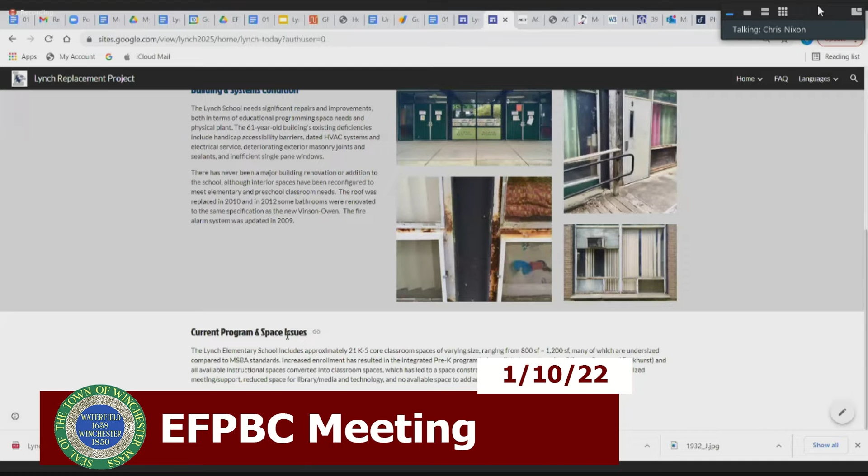We next have a page that describes what Lynch is today. It was designed as a junior high school from the very beginning in 1960. So there's a description of how the current school was intended, its size, and its overall condition with respect to the building and building systems. We also briefly describe some of the program shortcomings we have at Lynch, most importantly because it was never designed as an elementary school to begin with.

This is an interesting page that many people will be interested in - the site. It is a large but complicated site. We're adjacent to Horn Pond Brook Parkway, and we have setbacks required because of the floodway and floodplain conservation issues and restrictions here.

And then really the elephant in the room is this huge chunk of the site that's really not ours. This is not school department property. What you see labeled water department land was actually a well field built in the late 1930s in Winchester, used until the late 1950s, until we submitted an agreement with the MWRA.

So it's not our land, but our TAP A design team has determined pretty quickly that if this were our land, it might present some unique planning opportunities. For the public who didn't already know, at the last EFPBC meeting on December 20th, the committee formally requested the school committee explore a land transfer agreement with the select board, under whose authority this land sits today, even though it's an abandoned well field.

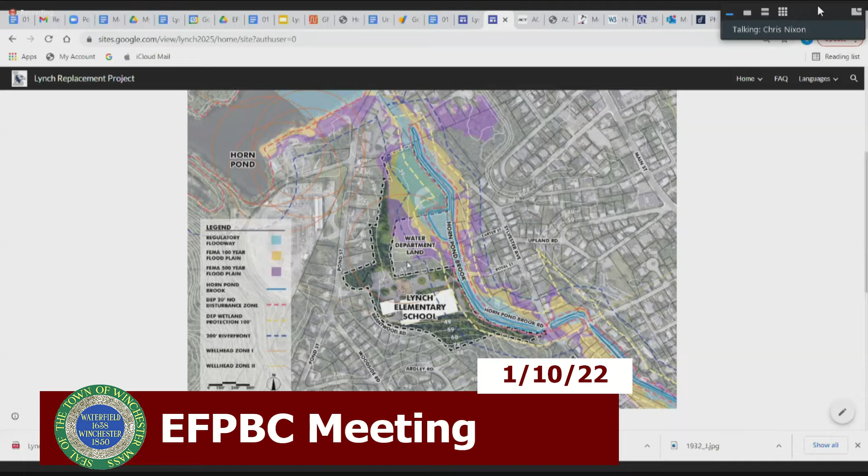There are 25 or 26 abandoned drinking water wells on this property. The school committee heard that request, we've discussed it, and we look forward in the next couple of weeks to having that conversation with town management and the select board. That'll be important for us moving forward.

If there is ultimately a preferred scheme - and Charlie will certainly dwell on this a little bit more in the presentation tonight - if there is a preferred scheme for the new Lynch that in any way relies on that land, it needs to be our land by the time the board votes on the approved preferred schematic in September.

And the final step in making that land transfer involves town meeting. So this is going to be, very quickly, a critical path item that may come before spring town meeting. For those who live in the Lynch neighborhood and care to go looking for it, the foundation of the old pump house is still there today in the woods. I think we will just continue to update this blue field with time when we have more information on how the conversation is going with respect to land transfer.

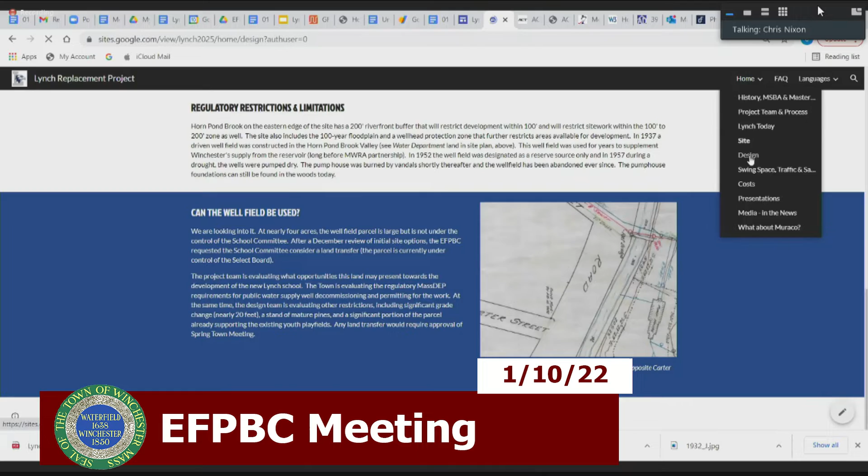Then we're going to go to a design page. Obviously a lot of information is yet to be posted because we're only just coming out of the starting blocks with TAP A. But here you see again a reframing of some of the conceptual design ideals the MSBA is looking for, some of the key metrics we'll be evaluating as we consider these different options. We also described some of the key project goals that were published in the project RFP, including our recognition of Winchester's climate action plan, adopted back in 2020. The school committee certainly is expecting a LEED certified building, so that's important to us as well. But look for much more information here on the design page.

There's been much conversation about swing space for the Lynch project. Swing space is just temporary space that accommodates students during construction. Here you see a description of the short and long-term benefits of swing space. We have a little history page about how swing space has been used on all three of the last major school reconstruction projects. With swing space, we actually moved the students from the Lincoln, Ambrose, and Vinson-Owen schools completely off-site for construction.

And then inevitably we often get questions from the community: what and where is Parkhurst, which comes up in conversation as a potential swing space destination. So some history here about that building, as well as some language about our future traffic and safety concerns when the project moves forward.

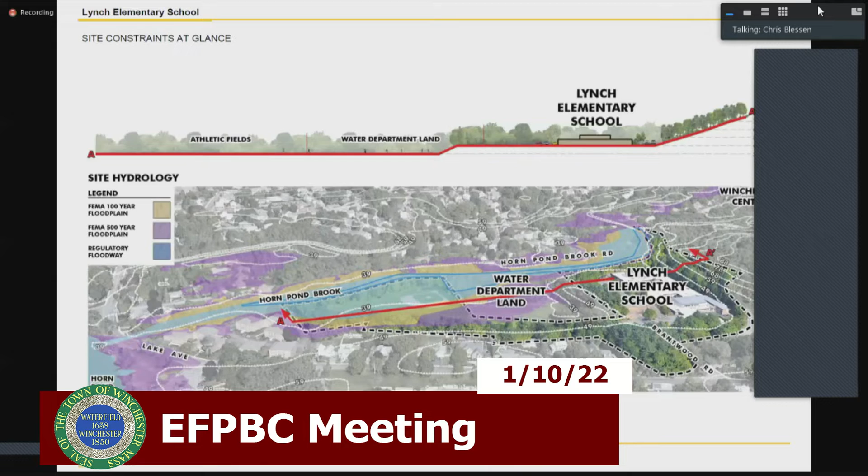So the first option was the renovation option here. What you see that we've added to these is primarily in the middle column, between the image and the description on the right. On the ones we carried forward from the last meeting, we started to add in a first floor concept idea where you can see what the first floor is doing.

Right now is not the critical moment to be talking really heavily through architecture or arrangement, as we've just started to touch the iceberg on those ideas, and we'll have more to talk about at the next meeting in terms of education and how these buildings, these different schemes, lay out.

But for now we're just talking about the first floor concept and the way that builds, because it has implications for the grades, the grade configuration, which is the second note down below the floor concept. And in reality, the renovation scheme, as one might expect, produces no change to how the building is configured currently.

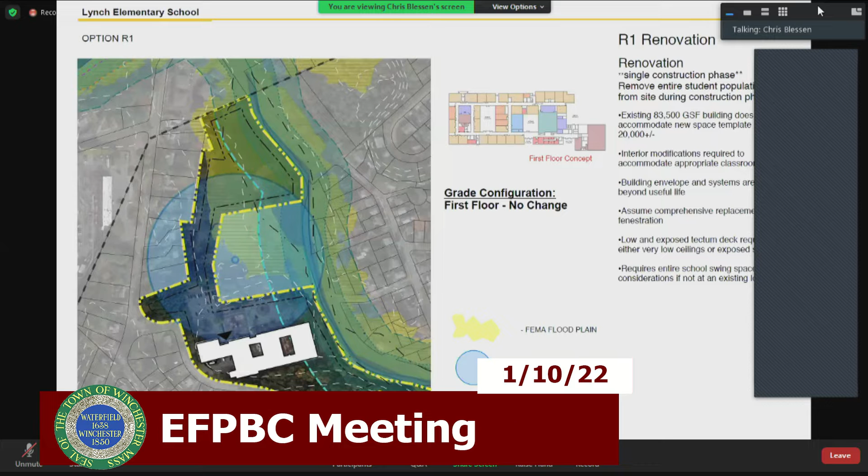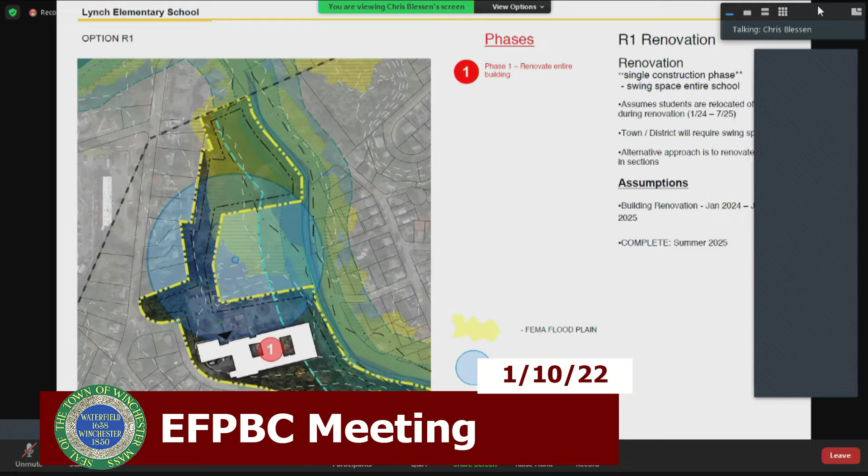And so this is that option, and I'll keep going here and show you the site plan is going to be the same. Just remember that this project requires that it be done all in one go, in one phase, which means this entire school would be in swing space for the entire duration of construction. And then there's that 3D perspective.

So this was AR1, the addition renovation, and this is the one that we had previously determined would drop off the list. I think it was mostly because of the vast disruption to the building and to the use of the building, and to the simultaneous construction and use.

It disrupts the site a little bit more than AR2 during construction, and so we have taken this off the plan. The committee removed it from consideration on the last one to favor another option.

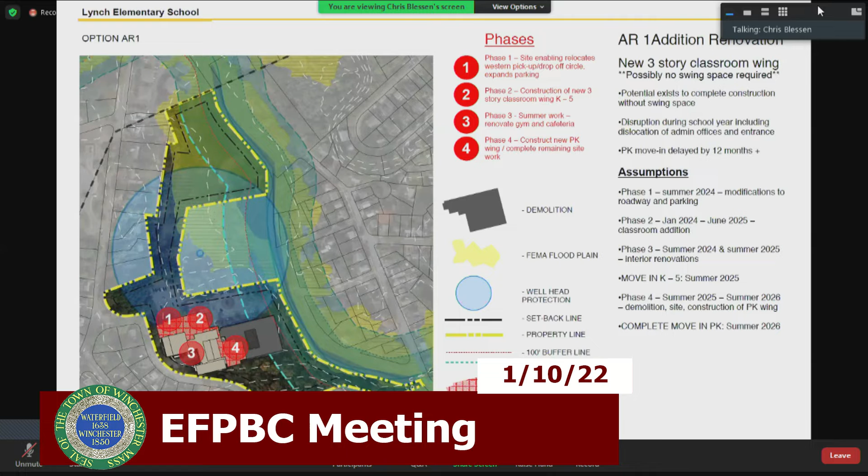Can I stop you just for a second? There's a gray box on the right-hand side of the screen. I don't know whether you can remove it, but it's blocking some of the text. Is that helpful? It's still there for me. Oh, there it's gone, and there's one at the bottom too. Let me see if I can get rid of that. These are the controls for Zoom. I don't know, I could move it. I'm afraid to click buttons there, so I'll probably leave the meeting. That is substantially out of the way though, what you just did was really helpful.

I think there were two others like that. Those are not 2025 completions. Those were some options that would take an entire other year, right? So I think that was something the EFPBC wasn't really interested in, going out to 2026. 2025 is a goal that we all want to pull for. Right, correct. So you'll notice that the duration extends if we don't do swing space or get aggressive on how we plan these things out.

Okay, so I'm sorry, let me go back here. So AR2 is where we are now, and this is another one where we were contemplating that swing space is required, but remember that the MSBA requires that we carry forward an addition renovation option. Out of the two addition renovation options we moved forward, this is the one that seemed more advantageous than the other one.

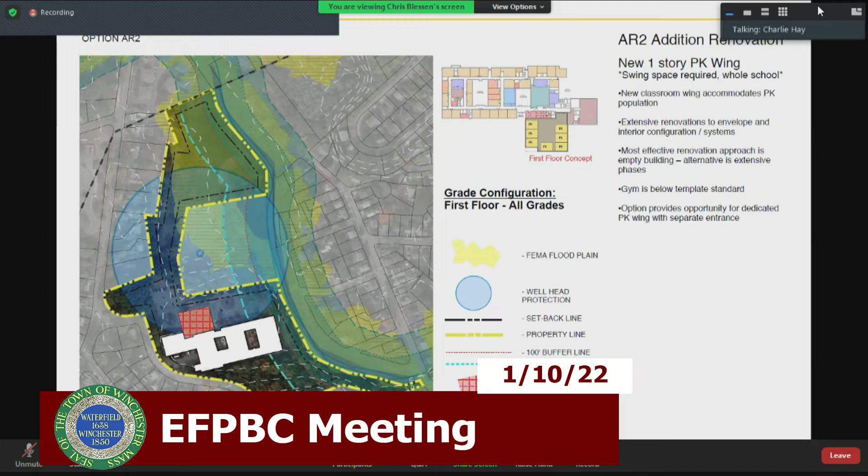Let me interrupt briefly in case anyone's scratching their heads at home. We'd probably have one grade on the lower level ultimately, so we'd have to add an elevator and have about four classrooms down there. So most grades are on one floor, but we're still assuming we're using all of the existing space in this building.

Then the phases are as follows. As Chris Blessen noted, you'd be able to move some kids in 2025, but most of it comes back in 2026 when the new building is complete. So there's some overlapping work, some nuance to phasing kids in and out of classrooms and swing space, but this would be a fairly significant disruption to school if the site is still occupied.

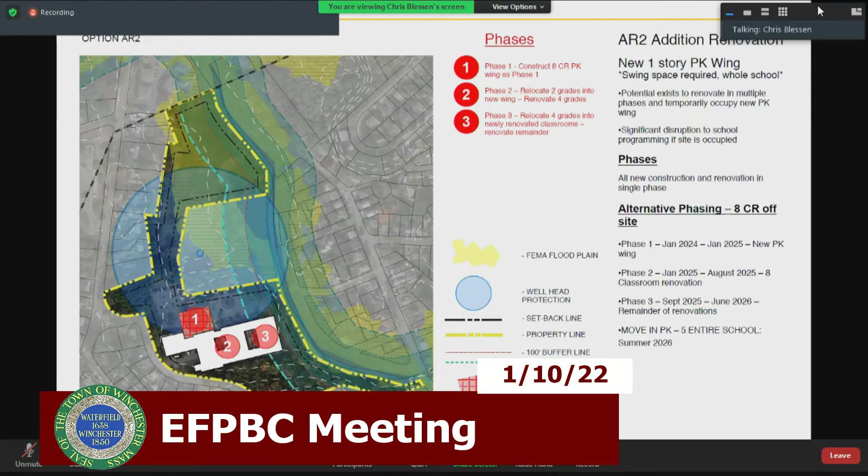This is a site plan showing what that renovation and addition might look like for this option. Again, similar circulation to what you have now. We'd have to move the pre-K play area and another play area to the northwest side of the building, but for all intents and purposes, site circulation remains much the same as what you experience today. The rest of the site would be updated to take advantage of the nature trails and natural context around the building.

One concern with this option is that the landscape architect felt buses would be better served coming in from the Horn Pond Brook Road side, which could be an issue since that's not how it is now—right now they come in from Brantwood Road. So that's something we'd need to discuss further. That was simply because you get a longer queue from the east, but that may not be a desirable outcome in terms of traffic. We're aware that this changes the current plan, and we did discuss it, but wanted to flag that these kinds of topics may come up depending on which option is being discussed.

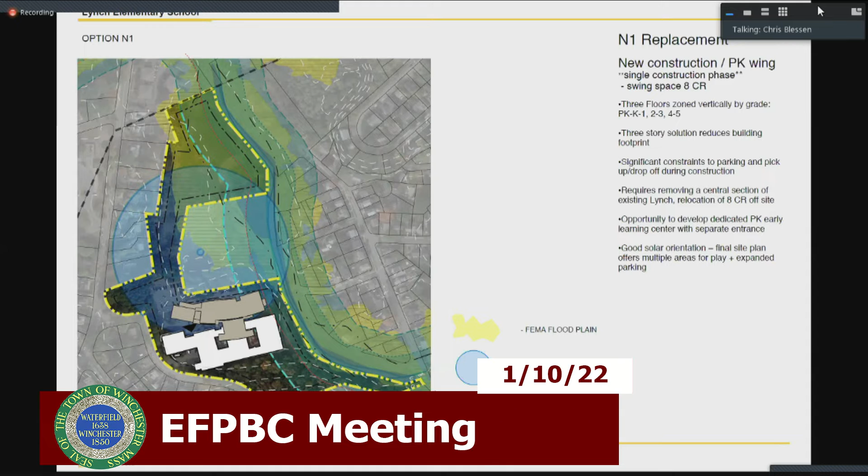...or reversing that sequence: demolishing the center area of the Lynch School to create a big opening into the existing building, then constructing the new building into that courtyard or freed-up space, moving the kids in, and then demolishing the remaining existing building. Either approach creates very significant complications for site circulation and constructability, given the tight constraints of having kids hemmed in right around an active construction zone.

So that's one of the disadvantages of this scheme, and these were the phasing assumptions around it. As I mentioned, option 1.1 just shifts some of the phasing to be the opposite, where the pre-K wing gets built out into the existing building.

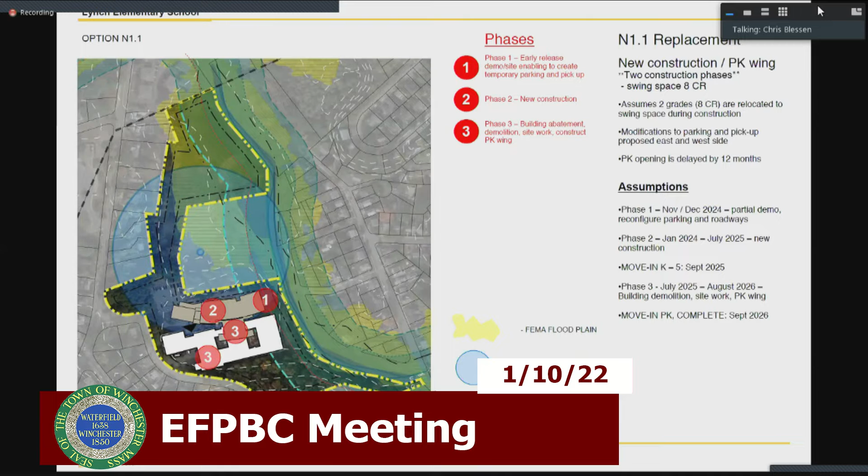The N2 replacement scheme is one we carried forward from the last meeting. The important thing to note, as you can see in the graphic on the site plan and the first floor concept, is that this proposal would be a school with pre-K and K on the first floor, along with other major building spaces like the gym, cafe, some back of house and kitchen, and the administration.

The concept is that it would be broken out with pre-K and K on the first floor, first and second grade on the second floor, and third, fourth, and fifth grade on the third floor. The decision points around this iteration are really about thinking through grade configuration and applying educational planning principles to these options. We've tried to show options that have various responses to that.

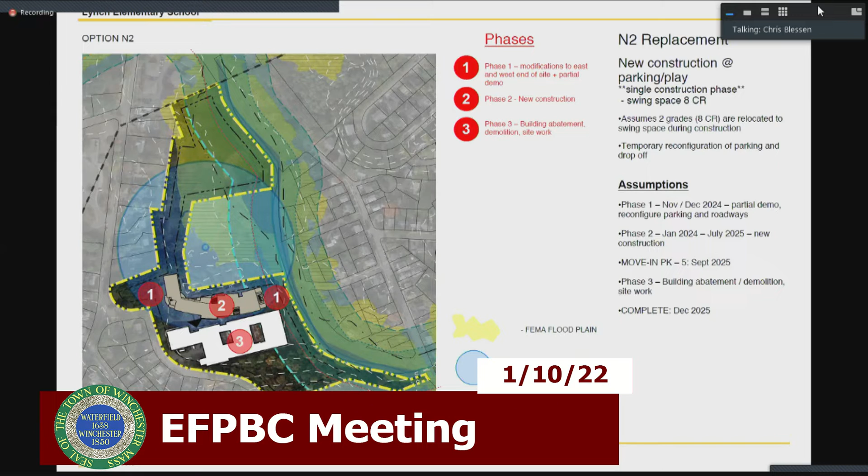The phasing on this one would be a little more simplified, with a completion date in December 2025, which was the goal for the Lynch 2025 project you saw on the website. So this would basically be: build some enabling work, build a new school, move the kids in, and then demolish the existing school after that.

A site plan would look something like what you see here. Again, these are all conceptual, so a lot of detail needs to be added as we get into the next phase. But you could have entry from both sides of the site as it exists now, with substantial parking on both sides, and buses with a very clear entryway and queuing scope.

I think the hallmark of this option ends up being this center green space that radiates out from the middle of the school and creates a safe learning and play zone on the south side. So you get good solar orientation and daylight, and the site is responding in an arc-like fashion to the movement of the sun, which is a better strategy for energy efficiency. This scheme has strong connections to the outdoor areas and nature, and that's really what's driving the planning and preliminary concepts around this scheme.

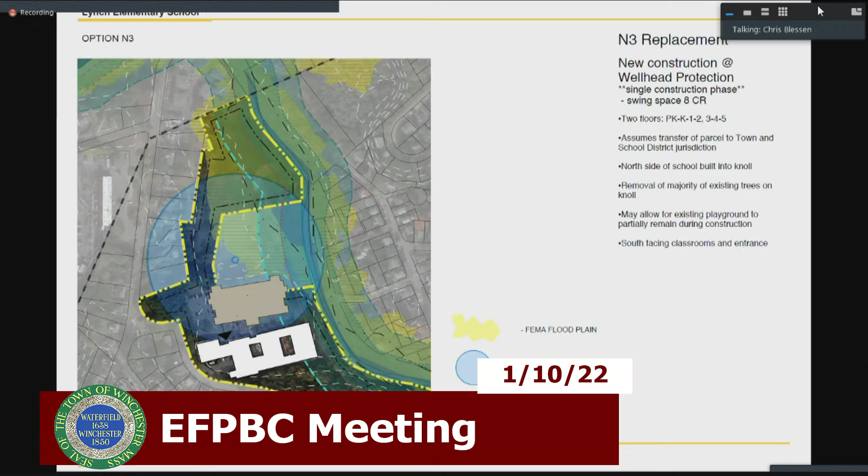Option N3 was a 2-story building. We did not bring option N3 forward from the last meeting because it takes up a lot of space on the north side of the school and is a 2-story building. I think the committee favored the same kind of looking option, but just as a replacement school on top of the existing Lynch.

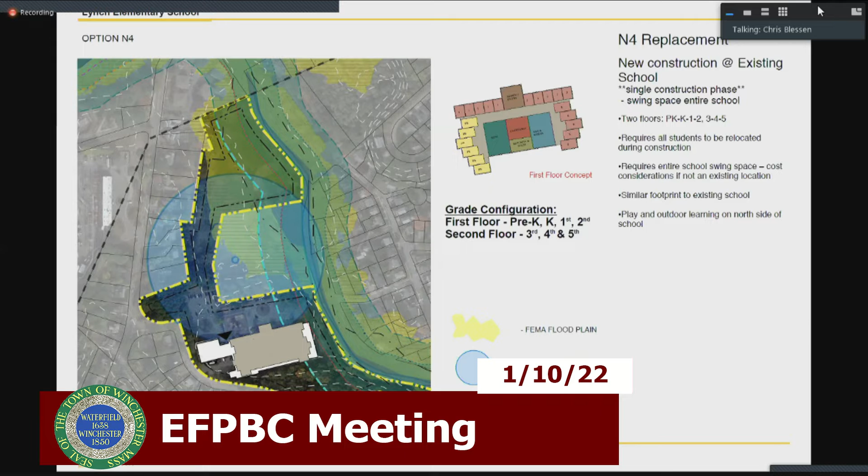So option N4 is one we carried forward as the 2-story option, which would require the entire school moving off site and having one single construction phase—just do the whole thing at once. With this option, you might do pre-K, K, first grade and second grade on the first floor, and third, fourth, and fifth on the second floor. This option, again a 2-story building done really cleanly, has a slightly earlier completion date because you're able to get at everything all at once.

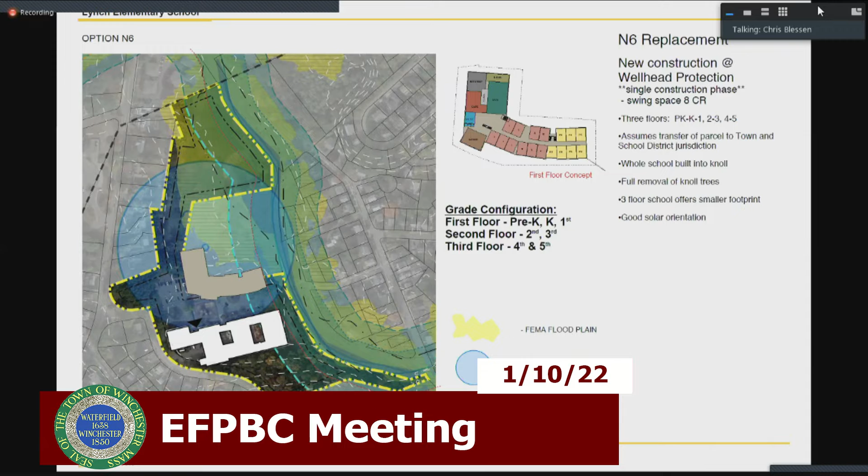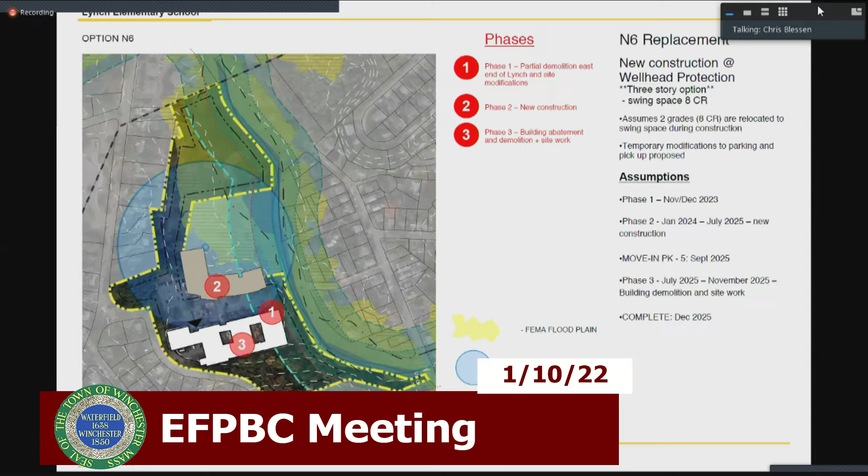This would have a similar completion date at the end of 2025 as the others. If you look at the site plan closely, you can tell this is scooted up about as far north as we can get, to get some space between the existing building and the construction zone. But we can't go any further into that yellow underlay area, because that's the velocity zone for the pond, the flood zone from the pond to the north. We have to stay out of that.

The site plan again has similar concepts to what you've seen before, where we're trying to get this green learning space to extend from north to south, really having the site bisected between the two access zones from the separate neighborhoods on the east and west.

So the building is really taking on a form to accept the green bridge from the north all the way through to some learning space in the green play area on the south, then through the building to the north learning space as it goes more into the nature landscapes. This site concept is similar to the others, but has a little different queuing and bus approach - I think the bus approach is on the west side on this one.

And this scheme pushes back more into the north and the wellhead site. But as you can see here, it gives a lot of space between new construction and existing school, which could help with the phasing of the project. But also from the neighborhood perspective, I think it would be a little bit more up in the trees, should we be able to protect a lot of those and keep them, which kind of would shield the large massing from some of the neighborhoods around to the east and west.

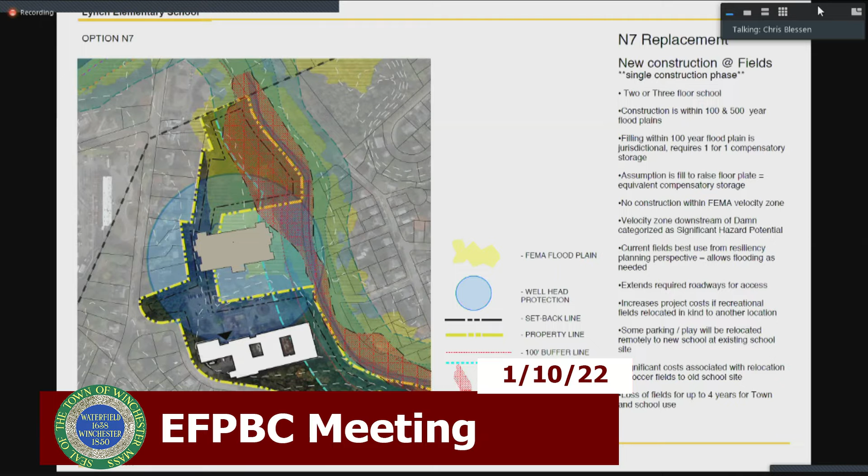So in a nutshell, here's the options that we've carried forward from the last meeting, again, as massing models, and I'll just kind of sort through those so you can see them changing over time and how they fit. And then again, to remind you of the ones that we had X'd off last time. And I think that's all I have. All right, thank you very much.

So we're going to open up now to the EFPBC's feedback and questions. And do we want to look at each one or start with each one and go forward from there?

Jay, I just had a quick point of information that applied almost to everything that Charlie and Chris just shared. Can I just ask them to take a moment and share, for the general public, when schemes that you show are some distance from the existing school, our expectation is some measure of swing space is still required. Can you talk a little bit about that—the realities of excavation, earth retention, construction equipment, laydown area, et cetera? Obviously, I think we understand when a footprint is on top of the existing ledge, but what about some of the others that Chris just shared with us?

That might be helpful for people to understand for context. So the replacement buildings that are closer to the existing building—you may be able to build next to it, but we're building on top of existing play area. We're building on top of existing pickup and drop off. And so the fact of the matter is it would be extremely difficult to run a school, run the site, having displaced a large part of your pickup and drop off zones and play areas.

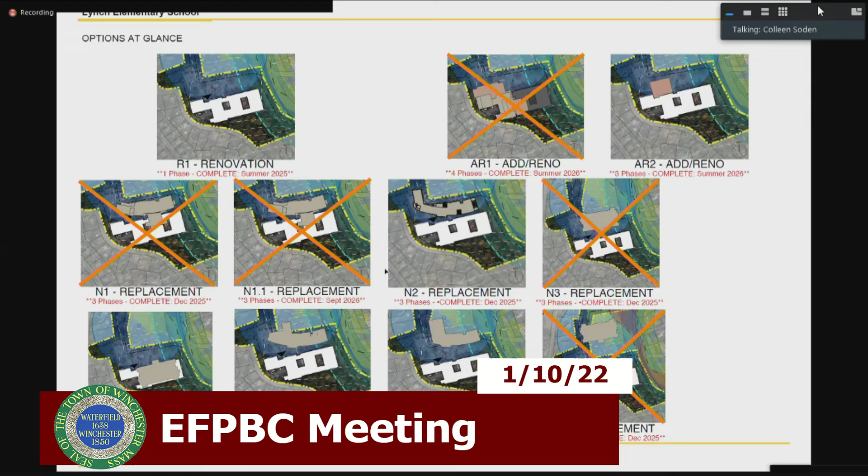So it might be easier, well, I guess we can stay on the slide. So one of the things when we had discussed the new placement of the building, this is for both N2, N4, N5, and N6, is opening up the open space to the forest. And I see that a lot of the parking circulation and parking area, maybe you can go to one of the sites, N2, N4, N5, or N6, the site plan, the circulation where...

You're showing the parking. Yeah, it's just, I see a really big swath of that open space in front of the school dedicated to parking and circulation, that's right adjacent to where most of the nature trails and things are. So I just noticed that. I wasn't sure if the program for parking was driven by any information that you got from the school, or if you were making an assumption based on square footage, how many cars in circulation.

You're muted, Charlie. I think the landscape architect to date is just trying to come up with a plan that gives us as much parking as they thought was reasonably possible. We have not yet had that conversation, but it's not likely that the school would want much less parking than that. I mean, we have to at least have enough for staff and some visitors. It may be that could be reduced a little bit, or maybe it's configuration. Yeah, I mean, these schools do end up with a fair amount of parking.

I know, and I know that a lot of the parking right now happens along Horn Pond Brook. Right, one of the... oh sorry, go ahead. Again, we've been talking about that green bridge, we are trying to come up with a way of at least connecting that southern landscape with the building in a safe way. So the other thing that I thought was successful, especially about this scheme, is the connection to the fields, so that's something I think is a linchpin.

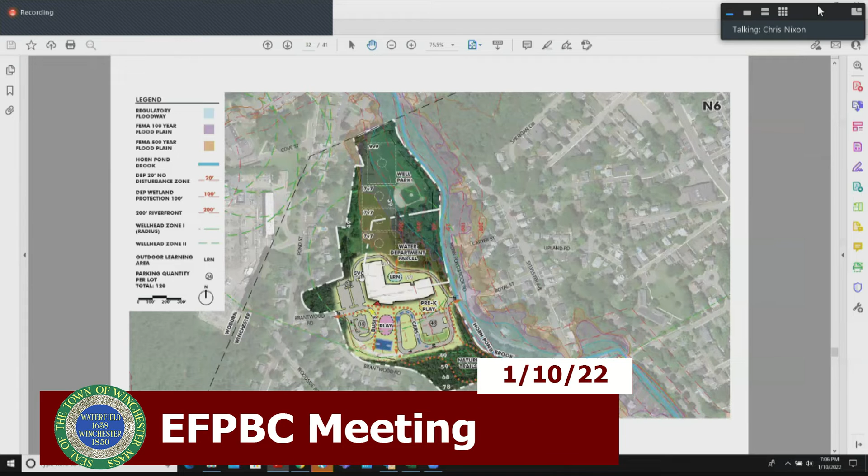Jay, can I ask a quick question? Yes, go ahead. So Chris, if you're probably in presentation mode, some members of the public were wondering if you could zoom in a little bit. So maybe if you're able to break out of that and just zoom in on this slide, might be helpful just for a moment. I think that may be helpful for some folks a little bit.

So I just want to point out that there are a number of restrictions to this water department parcel. We talked about the various environmental concerns, the fact that there are wellheads that are as yet to be decommissioned. There's also quite a lot of grade change. I think that topographic map suggests it could be as much as 20 feet from high to low, right along that property line that bisects this wing that runs from east to west. I wondered if you or Charlie might take a moment to talk about - and I know this isn't the only scheme that seeks to perhaps use some of that land - but could one of you speak to the opportunity as you see it to take advantage of that grade change, specific to a scheme like this with some of those larger assembly spaces? I know somebody mentioned, Colleen talked about the potential for the kids to run in from the fields, but some of these are just large volumes. So I'm thinking about comparing and contrasting this to VO, where you kind of similarly built into a hill with some of those larger spaces. I think that'd be helpful for some folks to understand.

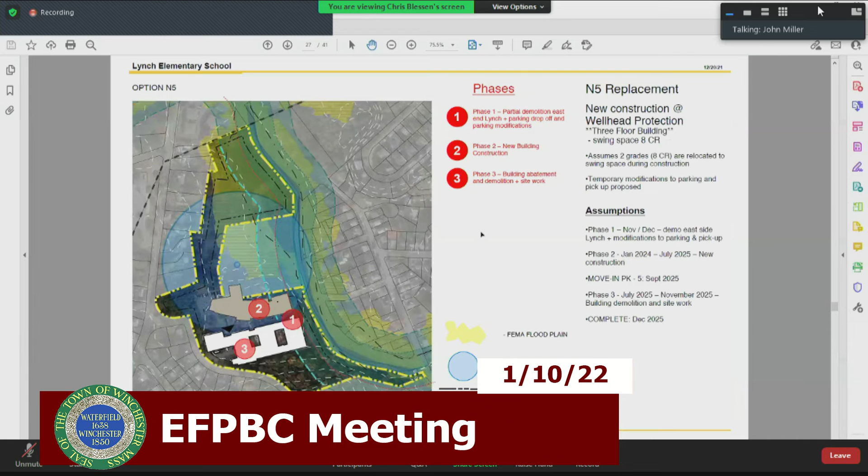So my question relates to the existing gym. I was very active in youth basketball for years. You know, the Lynch gym was a junior high school gym. So it's one of the few gyms of its size in the town, and one of them is the high school. So it's McCall and Lynch and the high school.

This particular picture gave me the idea - would it be possible, could you imagine a situation where you'd separate the gym so you don't have a gym and an auditorium doing double duty, and somehow in N4 consider refurbishing the existing gym? It's used all the time by youth organizations for volleyball, basketball, winter sports. It's one of the larger facilities of its kind in the town.

And if not, I understand the reasons - there's so many other trade-offs. But could it have life as a freestanding structure if it was separated, if the school moved north? Those are my two quick questions.

Well, you're saying build a school and the entire program north, and then have a spare gym sitting off that? Well, if N4 wasn't the option... I suppose that could be explored.

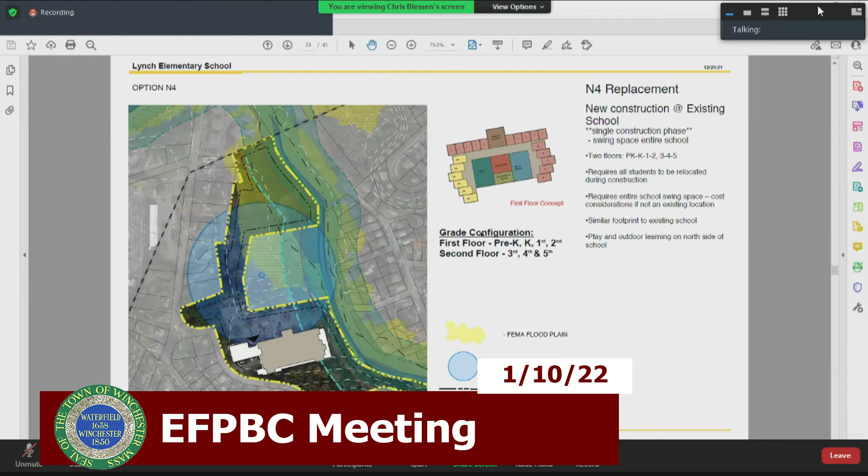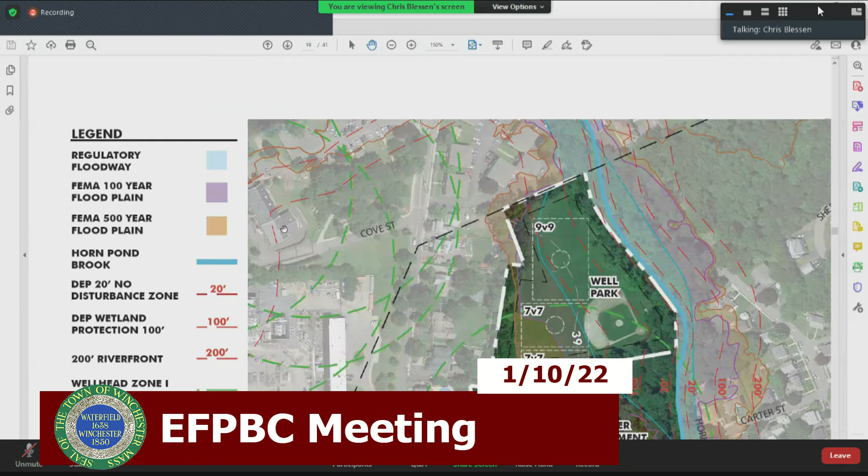This site gets - let's just say if you went into... I'll zoom in here. You can see that portion of the building is there. And I can highlight it maybe a little bit more, but...

Yeah, I understand the problems, but I guess when I saw many of your floor plans, it looked like the gym was doing double duty as auditorium in all.

I think the current thinking at the moment - we haven't taken too deep a dive into the educational side, but in the programming we'll have some better updates about the visioning and programming exercises we did over multiple days. It seemed the ideal scenario is placing the stage between the gym and the cafeteria so you could have two different types of spaces that serve as a performing space with audience - the larger space being the gym, but maybe a slightly smaller version being the cafeteria. That's why we've been showing it that way.

Yeah, but it could play out a whole number of ways. But I guess my view would be that'd be money well spent to provide the flexibility of having both the auditorium and the gym functioning at the same time. That's money I would spend, but it may not be money others would spend. But rest assured the proposed gym is actually larger than the pre-existing gym, so we're not reducing the size of the gym. This has come up on occasion over the years.

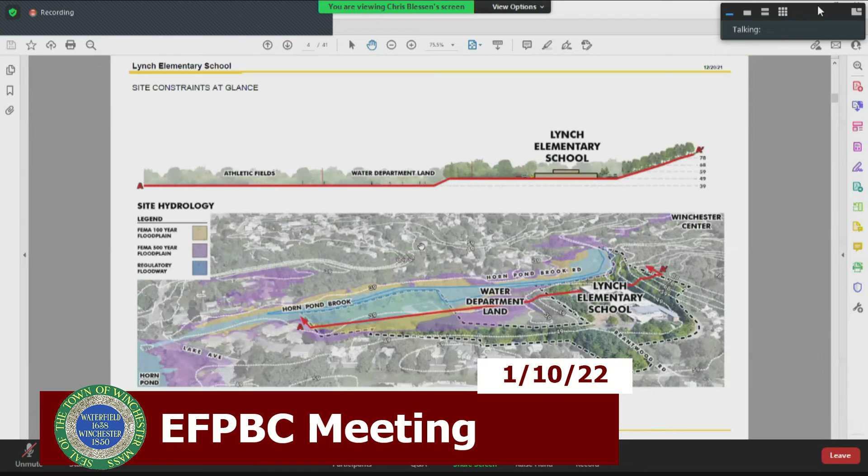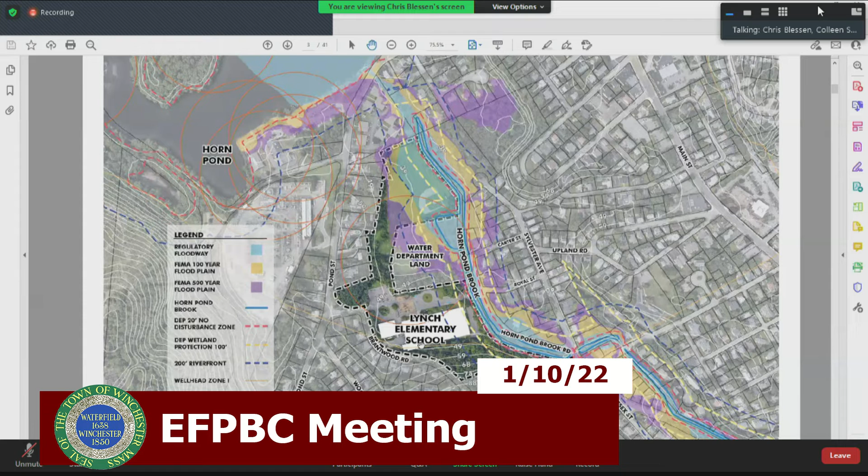All right, staying on schedule, can we open up to some questions? Chris, have you received any questions we can answer?

Yeah, we have. So Krista Luce, actually on this very subject, circulation, asks, do we have to keep both Brantwood and Royal Street entrances open? It seems like we might be able to consolidate the parking areas if we could only enter from one point.

I would just offer, I think this is a question about site access that the design team is really going to want to talk to the Lynch community about specifically. There were, I think, some strong opinions years ago. I've been a Lynch preschool dad twice, many moons ago. My first Lynch preschooler is about to turn 21 in a few weeks. But even back then, I understood that the Lynch community was concerned about that connectivity, the potential for it to be a pass-through. But years have gone by, times have changed. It's certainly an important point to talk to the community about.

But Charlie or Chris, do we have to keep both entrances open? Seems like we might be able to consolidate the parking areas if we could only enter from one point. Could you maybe speak to that from a design point of view, recognizing certainly that emergency responders have to get at least 300 degrees around a building one way or the other? What are your thoughts on that?

I would say programmatically and code-wise, I don't think you have to, but there are often times we are requested to. We have another project right now where we're building a second road into the site because having only one access road can be a problem if there's some incident at the beginning and no one can get in. So I think the notion of having access from one side to the other is something we'd definitely want to keep exploring, not jettison. But the idea of having all parents, buses, and most of your daily activity come from one side, with parking heavily weighted to one side, there's no programming or planning aspect to that other than preference from the community, which we've heard in other meetings the value of having access and drop-off options from both sides. So I think it becomes a community conversation more than a code-driven or requirement-driven basis. Charlie, I don't know if you have anything to add.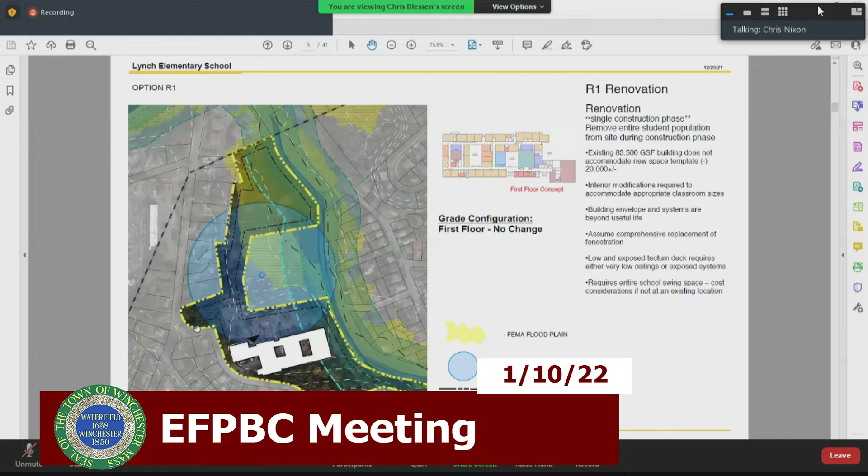Thank you, Jay. We have another question from Soren: the play areas in some of the plans seem awkwardly and perhaps dangerously placed between and close to roadways, raising concern about ball play being stressful, difficult, or impossible. Can you talk a little more about that — maybe Chris wants to bring up a plan? This is pretty conceptual, but it's a good observation. How might Charlie or Chris react to that?

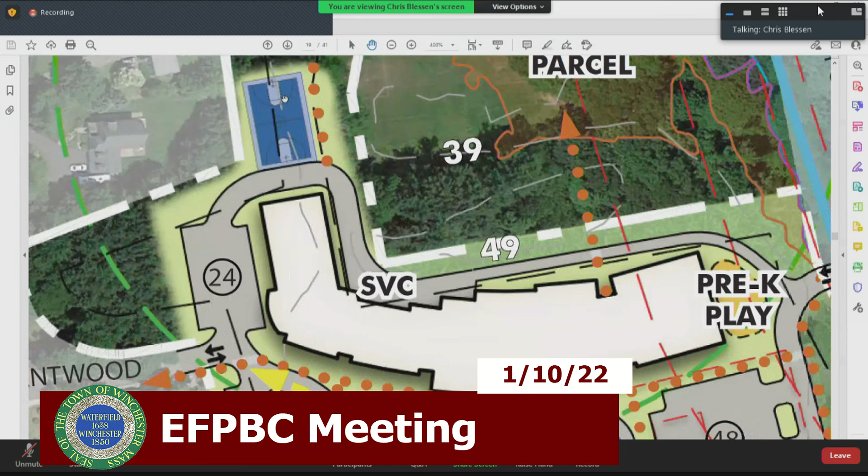Let me go to... I think that blue item, by the way, that's a basketball court, right? Yeah, it looks like an H in plan, but it's a basketball court. So not Swim Winchester's pool. Yeah, it's a basketball court. You can see up there, but let me zoom out one level here.

I think the simple way to answer this is that these are really like first-pass concepts of what could be happening. The thing to take away, as Colleen noted, is we want to strive for some connection to the outdoors. Maybe we haven't arrived there yet, but we also haven't spent weeks and months trying to wrestle with the site plans for very specific things. So the notion of putting play out here, I think, especially in this option...

You've got a lot of space between the roadways and the car pathways. On this one, there's a couple of others that have got a little bit more narrow, and we acknowledge that. But I think you'd find we're not going to try to stick play somewhere that's not safe. We would try to get creative about different ways to make safe play on sites. It's just you've got to have that for an elementary school.

That would be my first response. The second response is that while play is in session for the school, if this is not a through road and it's just a road primarily used for pickup, drop off, and parking, there's actually not a lot of vehicular activity happening. There's intermittent cars that would come for pickup or drop off or other things.

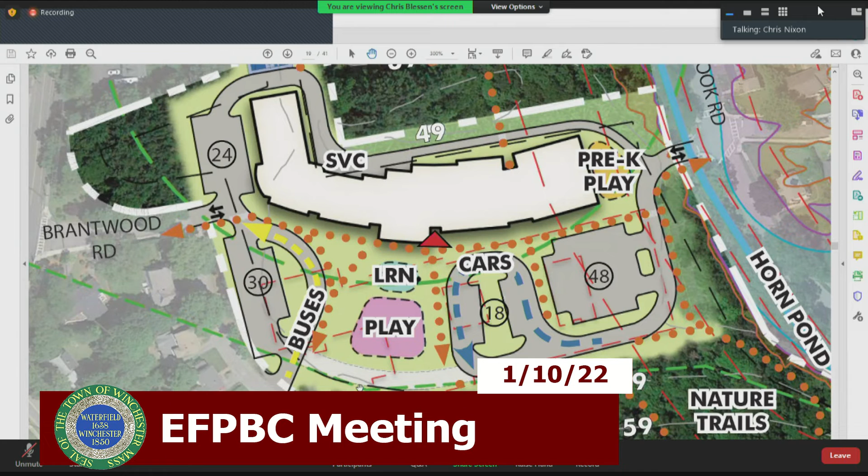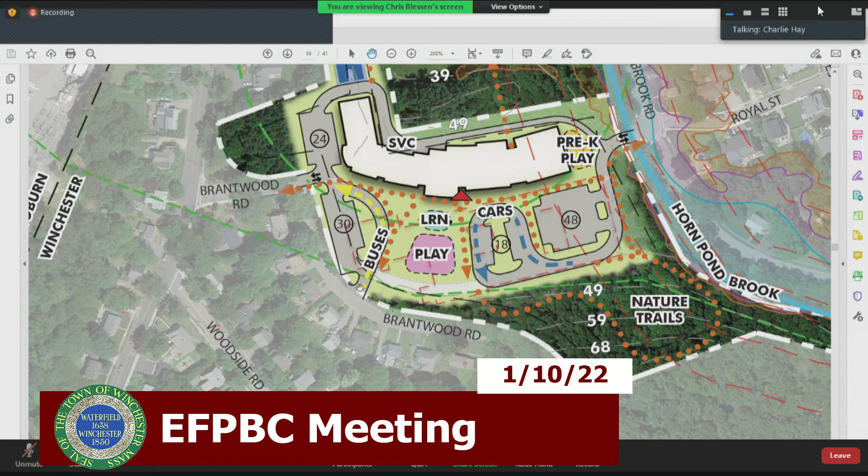So that's over on this side somewhere? Oh, forgive me, yeah, Brantwood Road. The only thing there is to the west, and I thought east - my mistake, thank you. That's a hill, and it's also heavily wooded. Well, this option in particular shows a new curb cut there to accommodate buses, so that is an option. However, it does bring more traffic onto Brantwood Road, so we have it shown both ways.

Again, part of the intent is to ultimately have different options, not necessarily because they are recommended or not recommended, but because they bring up topics to be discussed.

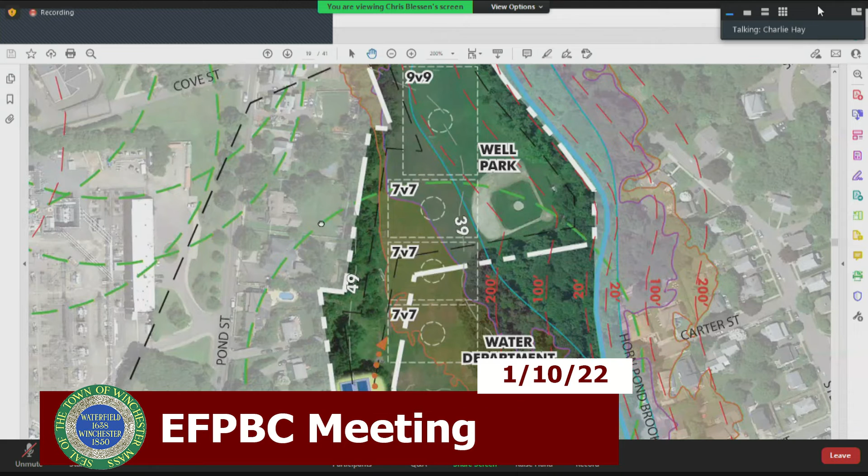But if you look at some of the other options on the Brantwood Road sides, there's a loop. You're talking about way up there? No, I'm just looking, Charlie. I don't think there's any other places to access along that side, so that would require significant cost from Brantwood somewhere.

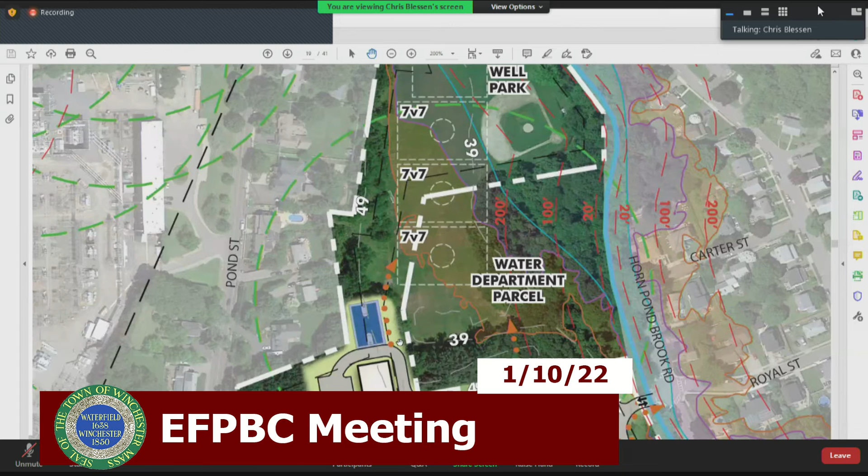Right, so my point was that this one does show a new curb cut further south on Brantwood as a way of using Brantwood for buses to loop around. Well, I think, Charlie, that curb cut is already there for access to the backside, it's there for service only - yeah, only the garbage truck goes back there, food service goes back there. Right, okay.

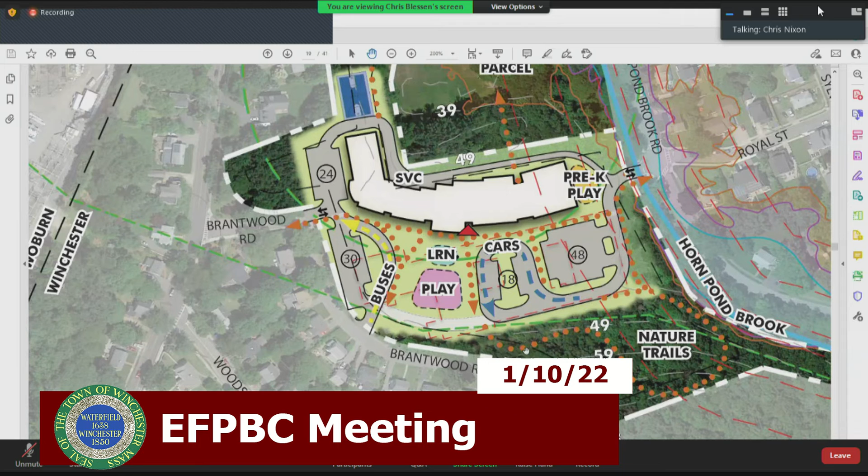Neil, if you've got other questions on circulation, if we didn't answer that, just keep plugging away with questions. Tom Hopcroft writes, in the N2, N5, and N6 options, assuming the school department picks up the well field - that is the transfer we talked about earlier - will we have landscaped areas through the currently unusable well field site to the fields?

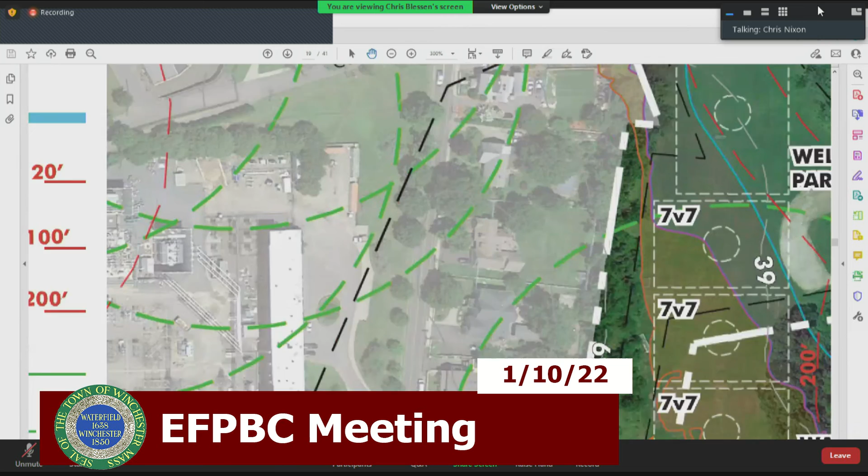So right now there's a thicket just where Chris's cursor was. We have a stand of some mature trees that look like eastern white pines, below that number 39 on the topographic map. But then to the right, this changes very quickly into a thicket of what looks like a lot of Norway maples, not eastern white pine.

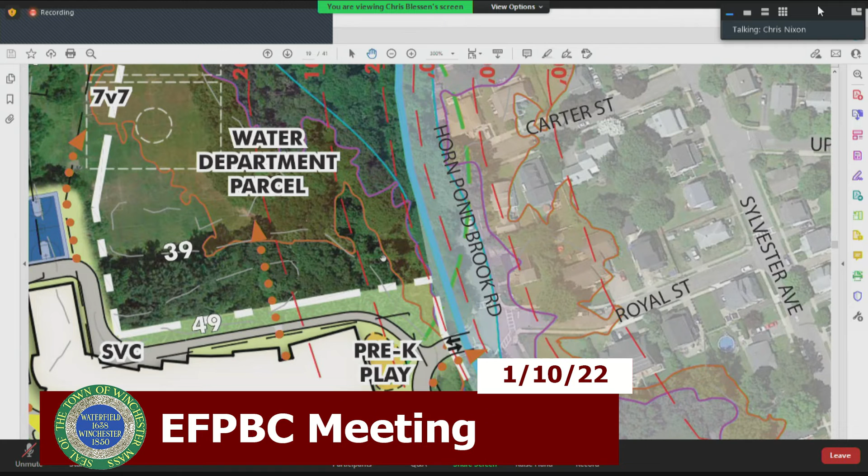So Tom's question is, will we have landscaped areas through the currently unusable well field site to the fields? In other words, a connection into the play fields, I think. Right, so this orange arrow isn't really showing you much design, but it's telling you we want to try to figure out a way to make pathways or boardwalks through the woods to the play fields. I think we showed a different option of that on one of these other ones - let me see if I can find it.

So this one, the further north we move, the more of the knoll we're developing, right? Part of the implication of moving the building north into that parcel is the opportunity to further develop it and create connections between the northern soccer fields and the school and the southern site. It's actually one of the really interesting implications.

Not only does it benefit moving away from the existing building during construction, which we talked about, but it offers that opportunity to develop the north side of that site, still below the soccer fields, as outdoor play, outdoor learning, potentially a place farther away from the road, more isolated for some of the play. I think there's a lot of interesting possibilities related to doing that.

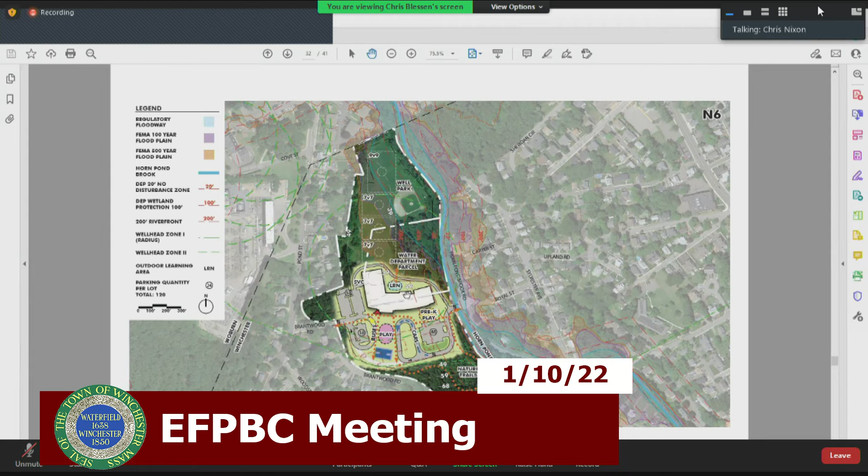So I might just take a stab at that. As Vivian and Charlie noted at the beginning of the meeting, we're not really making any decisions tonight. We're submitting to the MSBA really all the schemes that Tappé has generated, including the ones that have been taken off the table and those that are still open. We're not making any sort of preferential selection. I think a lot more conversation lies ahead of us.

At the next meeting on the 24th, we're looking for a report on the visioning sessions. There were 3 visioning sessions held with several of the team's consultants and administration, teacher, staff, and some Lynch parents. We may also have a conversation about some of the organizational strategies that could impact one solution over another.

So, for instance, what does Dr. Hackett think, based on his input from others, about organizing a K1, a 2-3, a 4-5? Does it make sense? Where would pre-K go? Does one of the schemes Charlie showed tonight, I think a 3-floor scheme, had just grades 4 and 5 on top. So I think the committee is going to hear more on the 24th about some of the organizational preferences that might come from administration and the superintendent.

And that may help the EFPBC continue to narrow the list a little bit. So I hope that answers that question. If anybody else wants to jump in on Fritzy's question.

Mr. Foley did fire back, so we have one more question. Neil says, with respect to that circulation question, he's referring directly adjacent to Brantwood, just to its north, where there's a small wood lot. I think you were talking about that thicket, right? When you just turn in off Horn Pond Brook Road, there's that stand of trees on the left. This might decouple the entry from the residential street.